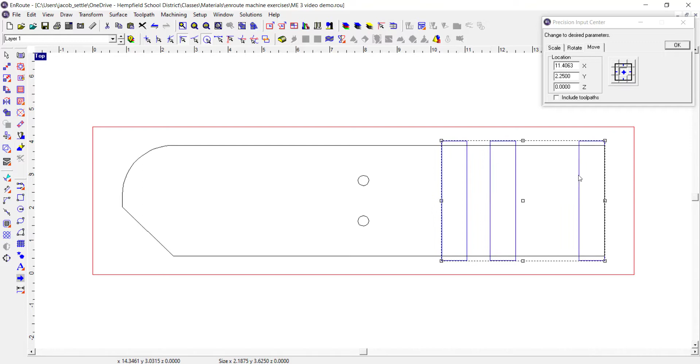And we're going to go to a hatch fill for this one. We're going to sort first by end mills, and then select the 1/4 inch end mill by double clicking on it. We're going to add our depth in, which is 0.25 for this project.

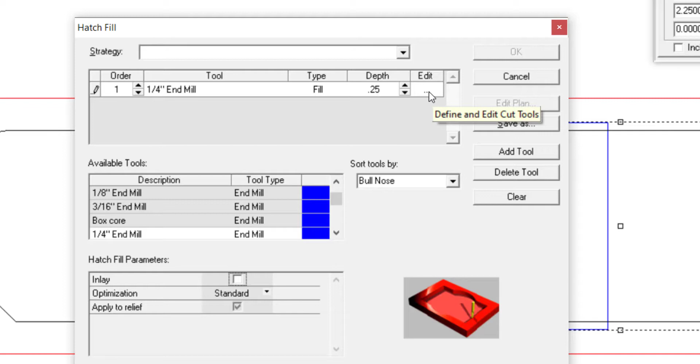And then we're going to go in and edit our cut. So we have a couple things to do here. First of all, we want to look at the depth - 0.25 is good. We want to look at the fill. We're going to change our hatch angle to 90, otherwise it's going to go side to side. We want it to go along the pocket.

We're going to open up our passes. Right now it wants to do that all in one pass, which would be a lot, so we're going to do 2 passes on that.

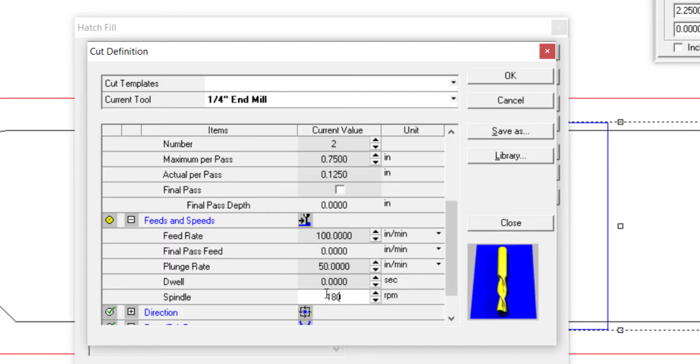And then we're going to look at feeds and speeds. For feeds and speeds, our feed rate, we're going to run this at 100 inches per minute, and we're going to plunge in at 50 inches per minute, and our spindle max speed 18,000. So we're going to hit OK on that. Again, 100, 50, and 18,000 with 2 passes and a 90-degree hatch angle. So we're going to hit OK on this.

So there's our toolpaths going through those 3 cuts there. Next thing we're going to do are the 2 circles.

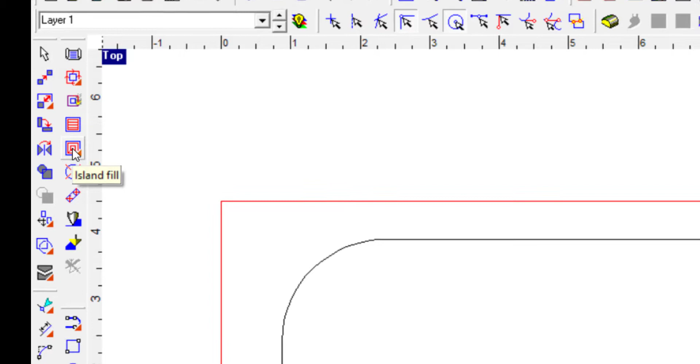So I'm going to grab these, and I'm going to do an island fill for this one. So we're going to select that. We're going to double click our 1/4 inch end mill. Now these are going all the way through, so your depth is 0.5 for this.

And we're going to go and change our passes. Let's do 4 passes on that, so it's only taking 1/8 of an inch per pass.

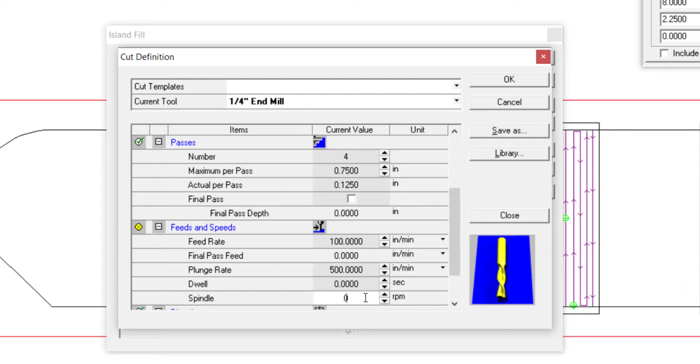Let's take our feed rate, and we're going to do that at 100. We're going to do our plunge rate at 50, and our spindle speed at 18,000. And we're going to hit OK on that one.

All right, at this point, we're ready to do our last cutout, which is the actual cutout of the part. So I'm going to select the geometry that goes around the outside, and up top here on the left I'm going to select router offset.

We're still using the 1/4 inch end mill, so you want to find that 1/4 inch end mill here, and you want to double click on that, take that up to the top, and the depth on this is also going all the way through, so I'm going to set that to 0.5.

We're going to go back in and we'll take a look right now. This is for our passes. It wants to do this in 1 pass. We do not want to do that. We're going to do this in 4 passes so that we have an 1/8 inch cut per pass.

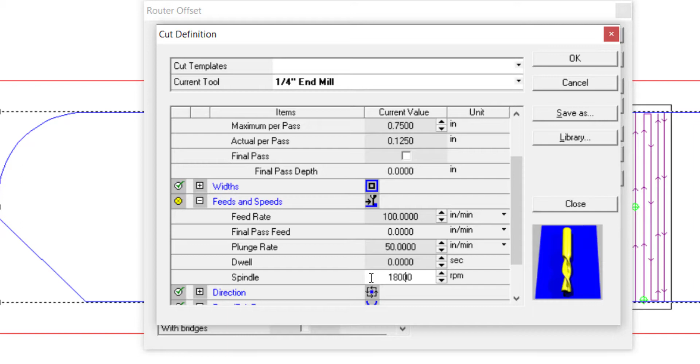Again, our feed rate, we're going to run this at 100. Plunge rate is going to be 50, half the rate of our feed, and our spindle set up to 18,000. So we're going to hit OK on this.

Before we get out of here, we are going to add some bridges so this part doesn't break away from the plate when we're done here. So we're going to add bridges, and I'm going to add 6 bridges on this part. So we'll hit OK here. The bridges are shown in green.

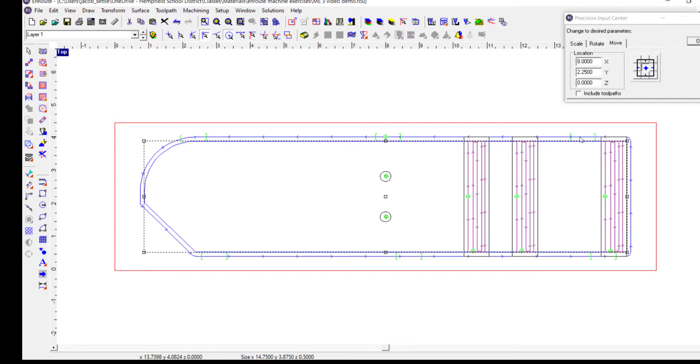We may find that we want to move one of those. Looking around, this one is right on the radius, so I'm going to go up to Toolpaths, into Edit Bridges, hold my left mouse button down on the center of that bridge, and slide it over. That's going to make it easier to clean up later so I don't have to deal with that on the curve. The other thing I'd look at is this one is right in the center of that rabbet on the end, so I'm going to slide that one back a little bit.

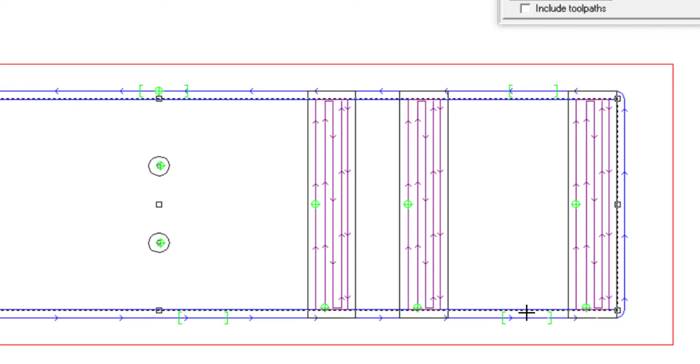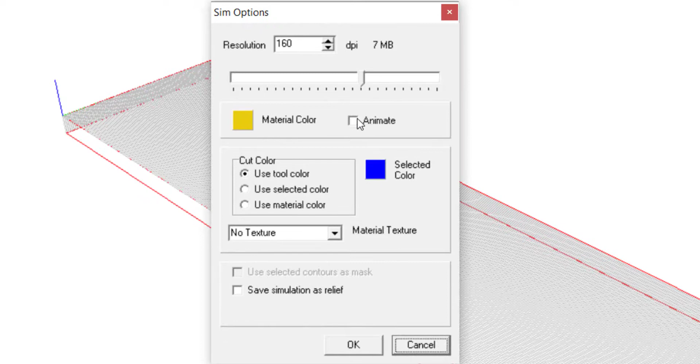The other two look pretty good. So now we're ready to toolpath this, so I'm going to right click and exit the tool. Notice those are set up and those are good. I want to see what this looks like before I send it to the machine so I don't get any surprises. So we're going to simulate 3D, animate the Toolpaths, turn on the light bulb up here so we can see our part, and then hit play.

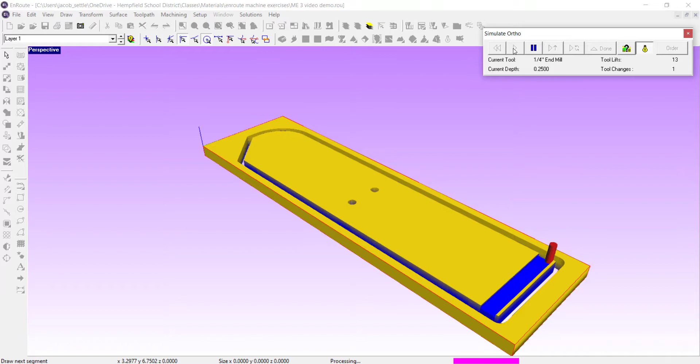So looking at our tool order right now, it looks like we're going to have a problem. It drilled one hole, then cut the outside out, and then it's going to go back and do our dado. So we're going to have to do a little editing to the tool order before we go any further. In our simulation, it actually cut the part out before it went through and did the dado and the rabbet on the end. So we're going to update our tool order.

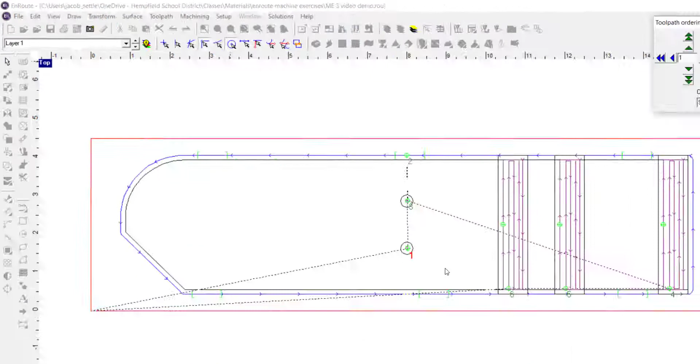I'm going to go up to machining and order, and you can see the toolpaths are numbered, so it's drilling the hole first, then cutting out, then drilling this hole, then going 4, 5, and 6. I'm not really concerned about which one happens first, I just want to make sure that this last piece happens at the very end of my operation, so that needs to be number 6. So now it's going 1, 2, 3, 4, 5, and 6.

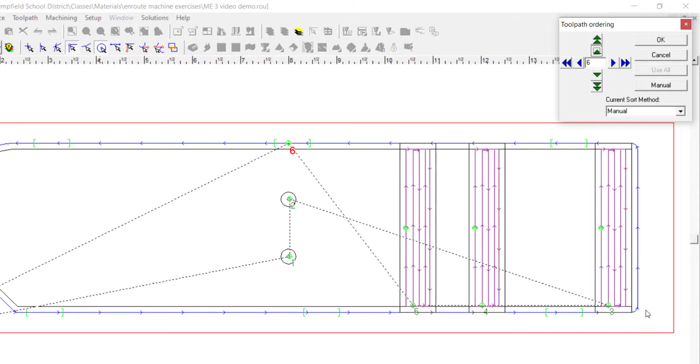That looks good, so we're going to go back and simulate that once again, just to make sure everything looks good. We'll turn our light bulb off and hit play. Now we have our two holes.

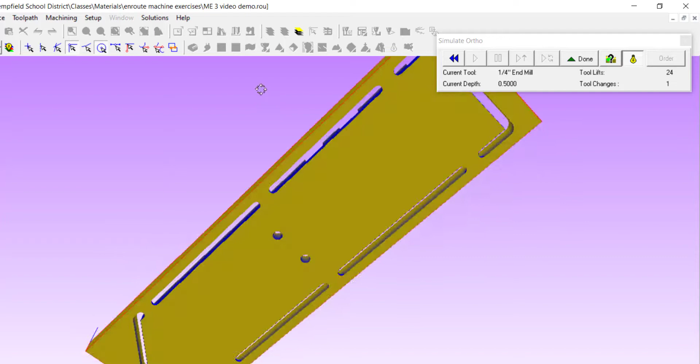Now that that's done, holding shift and my right mouse, if you flip this upside down, you'll see those bridges that it added. Those are important so it doesn't break away from the part until after we're done. We can nip those with the bandsaw when we're all finished. But the tool operation looked good there.

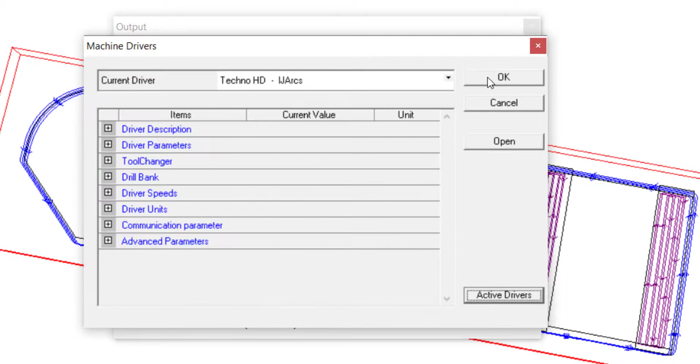So I'm going to get out of my simulation and go up to tool machining, then to output at this point. Now, if you've already done one of these before, the driver is probably set correctly, but we want to check that your driver is set to IJ arcs. If it is, you can simply hit OK here. If not, go to active drivers, down to the Techno HD, and look for IJ arcs. You have to have that selected in this middle panel, then hit OK. Hit OK again, and then all you have to do is hit to file.

This will be saved as a .nc file, so this is ME3, and I'm going to put my name there. I'm going to put demo one here because I already have one saved in there. But make sure you name that, don't add any special characters, and make sure it gets a .nc on the end. And then I will help you set that up on the CNC router.